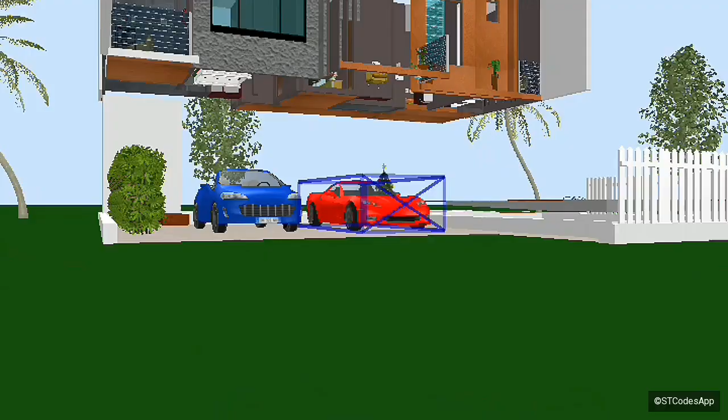Okay, so welcome. This is our podcast channel Mayemki, currently doing architect design, and today we have these architect plans. As we show you all, it is a house which you can use as a farmhouse, and currently it comes with 4 bedrooms inside.

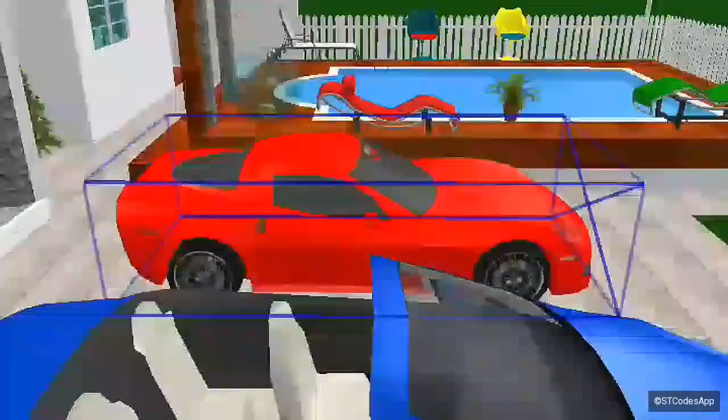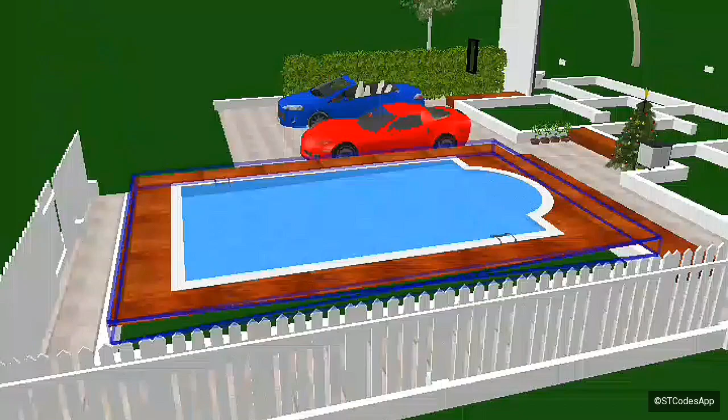See, it is a 4-bedroom house and it looks like so. This is the simple one. See, the parking area, you can park 2 vehicles over there and enjoy the beauty of life. Now we are moving, alongside it has a swimming pool.

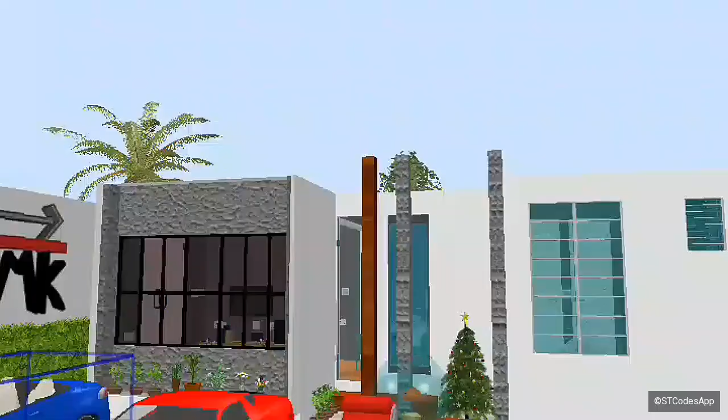See, this is a swimming pool. Here you can swim, relax, have some fun with your family, and also chill after the rest of your day. You will feel tired, okay, you can chill here. Okay, you can park your vehicle over here.

So now we are going to see the ground level as usual. It is a floor plan, and as usual we started with the ground level. On the ground level here we are, on the inside, and currently it looks like this. See, the full building looks like this. It is a good one.

Okay, now we are going. It has 3 main entries, and the first main entry is here. This is accessing the dining hall. See, this is the dining area. Here you can have dinner. You see, when you are in the dining area, you can see the staircases.

Also, alongside it has this living room. It is a good and huge living room, and on the living room is the second entry. As I told you, it has main entries. This is our second entry, alongside the brand name Mayemki.

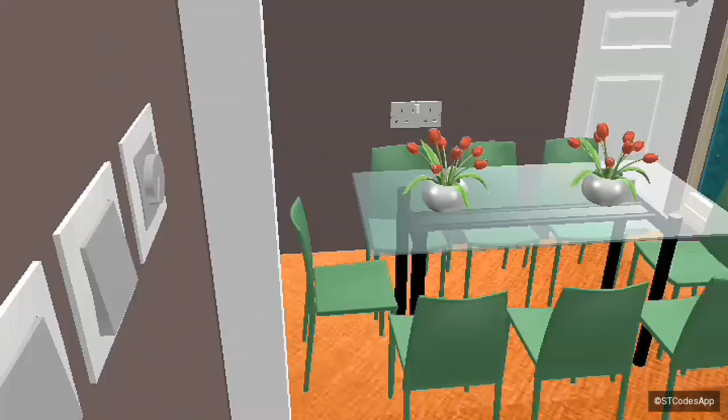Okay, and after moving that, you see we have here, and here as you can see we have 2 options. We have that door, it is a public toilet or public bathroom. See, it is a huge public bathroom, coming up with a door here, a shower cabin, as well as a jacuzzi.

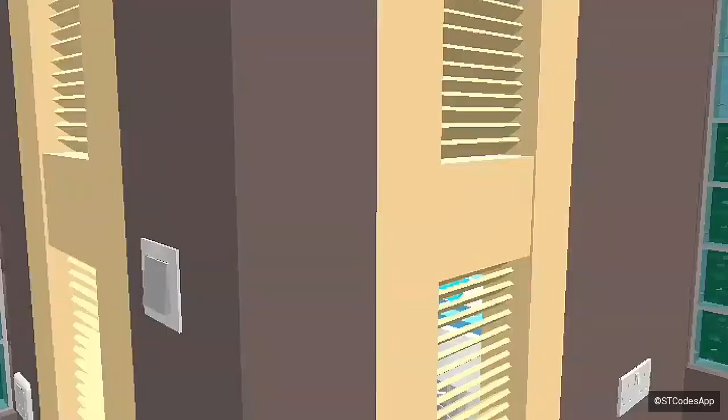Okay, see, and here it is a staircasing area. Now we are moving from that. We are accessing the dining, and we see we have this bedroom.

It is the first bedroom of the house, and this is the beauty of this bedroom. On the ground floor, it is a bedroom that you can enter in 2 different ways. See the door which we entered, and we have the bathroom. Okay, this is the bathroom, and it looks like this.

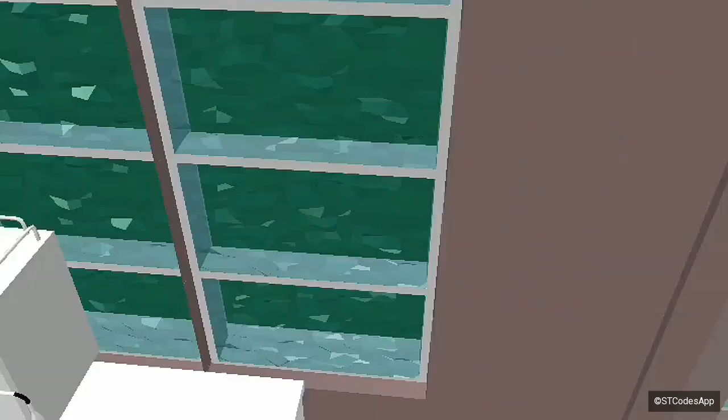Here is our storage link, and also this storage link is alongside the kitchen. This is our kitchen, the heart of the house, the huge kitchen. Here everything can be cooked, alongside the dining area. So that is our ground level, and it looks like this.

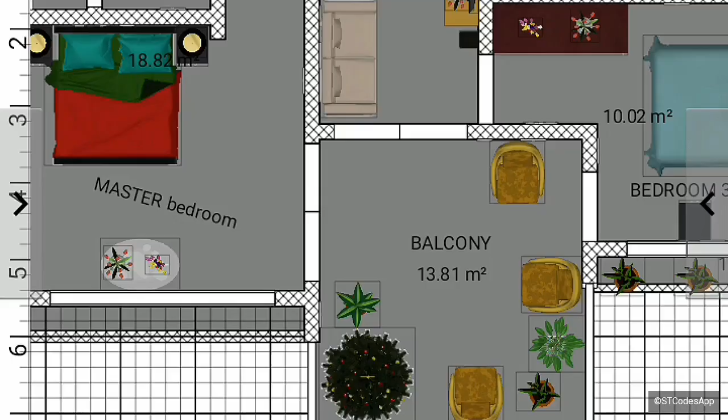Now we are going to see our plan on the first floor. This is our floor plan here, and we have the second living room, which is used as a study. It is a second living room where you can chill, have some fun, enjoy the beauty of life.

Now we have this second bedroom. See, we have this second bedroom, and every bedroom has access to the balconies. It's our second bedroom, and every bedroom comes with its own bathroom inside. Okay, see, it has this bathroom inside. It is a house which is complete, has everything inside.

It has the bathrooms, okay, it has the rooms, it has the balconies where you can relax and chill. See, like this balcony, it belongs to this room. You cannot enter it without entering this room.

Okay, now we are going to see the other bathroom and bedroom. See here, it is our third one. Okay, it is our third bedroom, and also it has access to the main balcony, and it has its own bathroom. Every room in this house currently comes with its own bathroom, and also there are shared ones.